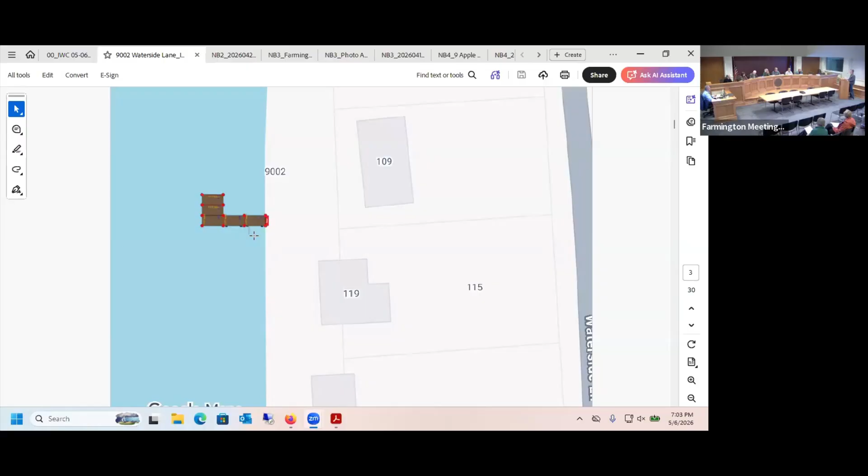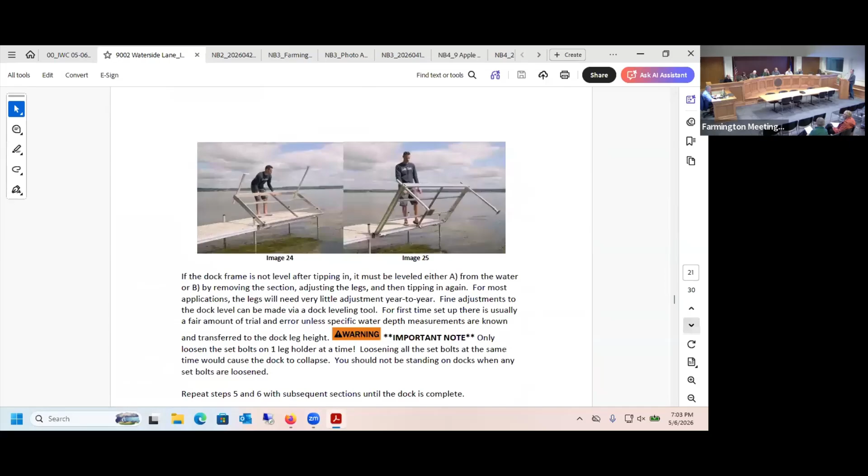The application was accepted a month ago. Nothing has changed in the application. It's aluminum and untreated cedar, and it requires about 4 screws to screw into the wall next to the bulkhead there on the lake, and then remove it, put it out in spring, remove it in the fall. No, nothing else has changed. I'm happy to go over it again as a refresher if anybody wants to, but otherwise it hasn't changed from last time.

Okay, you might as well just quickly, in case those that weren't here last meeting. Yeah, sure. So it's going to be about 24 feet long, 5 feet wide, with a small platform at the end. The retaining wall, as you can see in the photo there, it existed before we moved in. So it's there, we're going to literally screw into the retaining wall.

4 screws. It's 2 aluminum pieces along the retaining wall, and then the segments drop right into the water. They settle on the bottom. There's no footings required, there's no concrete, there's no anchoring other than letting it sit on the silt on the bottom. Each segment is, I don't remember off the top of my head, but I believe it's like 6 by 6 or 8 by 8 or something like that. And you drop each in, and then in the fall you can literally lift them up and pull them out. That's pretty much the extent of it. It is like in that photo, it'll be literally right there.

I took a photo of where the design is to screw it in. It requires no removal of trees, brush, no construction of any kind, really, just the screws. Okay, I don't have any questions on this. I'll ask the board. Mark? No questions. Robert? No questions.

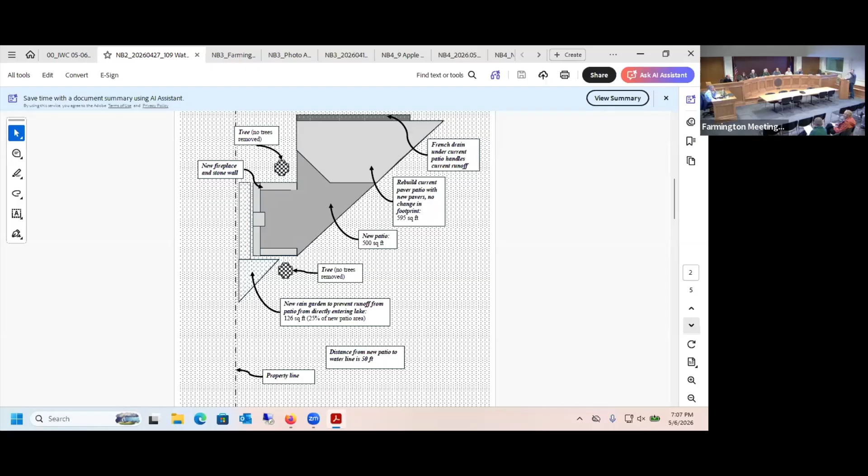we want to remove the existing patio and replace it with new pavers and extend it slightly, an extra 500 square feet of patio. The goal here per the picture is we don't want to remove any trees. In fact, West Hartford just did a report about tree cover in West Hartford, and it's a big problem that people are removing trees. So we're actually working around the trees, and we wanted to put an outdoor fireplace on the left. In order to deal with drainage at the top, down to the water, you can't see in this picture, is about 60 or 70 feet down to the water, and we're up on a hill. So the grade of the hill actually goes towards the house, not towards the water.

You can see it in those pictures. That grade actually comes towards the house. We actually have more problems with water coming at our house than going away from our house.

But for drainage of the new section, we are proposing a rain garden that effectively wraps around the back of it. We got guidance for the rain garden from UConn about the depth of it. They suggested 5 inches, but we were actually targeting 12. And the University of New Hampshire has a list of rain garden plants that are best for absorption of the rain.

The garden would wrap such that it basically connects with where the water from the other drainage is already going. So really, our desire here is to extend that patio out between those two big trees in the picture.

and put a fireplace between them. We talked to the association around the lake, and they approved. We had to present to them as well, and they approved it. I think that letter is attached in your materials. But that's the extent of the work that we're looking to get first accepted as an application and then approved.

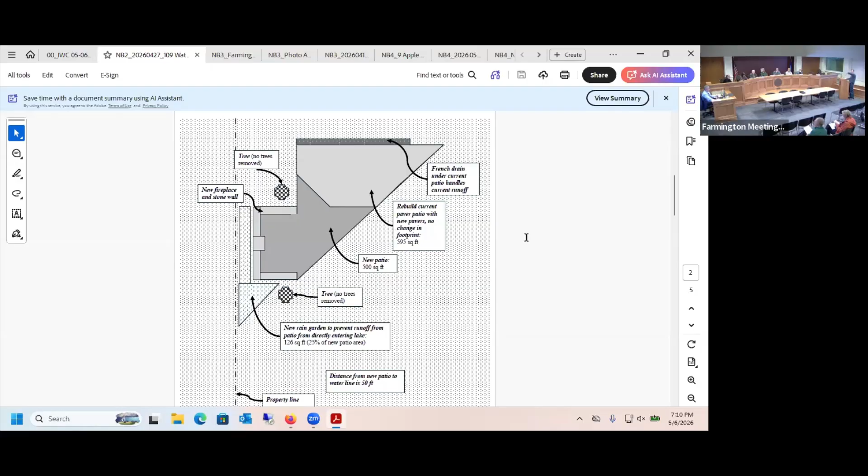And the pond is over here. The pond is actually on the total other side, past the property line. So the pond is off where the tree is. If you go down, the pond is below everything. It keeps going up, there's a little bit of a graded hill, and then it swoops down into the lake. So the pond isn't even pictured.

The best way to see it is the other image, which shows the property and the lot number there. There's another image, the aerial image. How about this one here? Is this any better? Does this help?

Yeah, that helps. So the patio, I can point to it right here. These are the trees. It would be here, the lake's over here. The rain garden would be roughly here and back here. This is the grade going towards the house before it swoops over there. So it would meet with the existing drainage that's already there, that's the goal.

Bruce, how do we get that screen on our tablets? It should be on there.

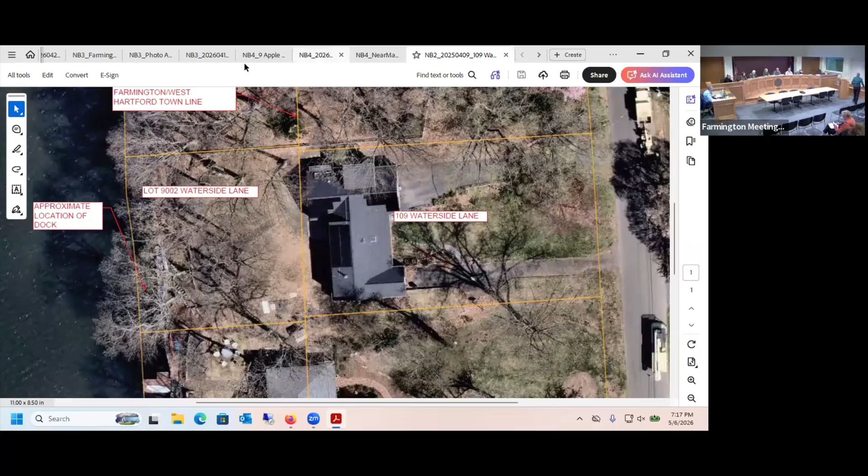Thank you, Mr. Chairman. I'm Peter Darpalin, 21 Centerbrook Drive. I'm here representing the Farmington Land Trust. I'm a board member.

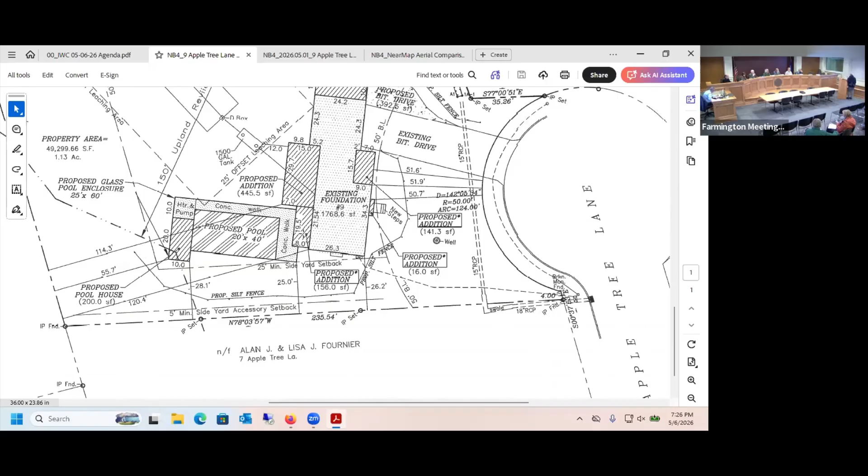And the rest is the pool. So the pool is being constructed at the same time? Yes, the pool was already approved on the last permits before the house burned. They had to dig the hole out and everything, but the house burned, so the construction stopped.

And that map was prepared by your surveyor or? Yes, that's the surveyor and the architect.

So it's just within your lines, slightly, or you have some increase on the ends and a little bit in the front and the back, is what you're saying? Is this a basement foundation? Yes, that's the basement foundation.

That's all the questions I have at the moment, but do you have - is the house fully designed? Yes, yes, I sent the plans to Bruce. Yeah, I thought I saw the plans on SharePoint. Do you want those opened up? No, okay, I'll open it up for questions.

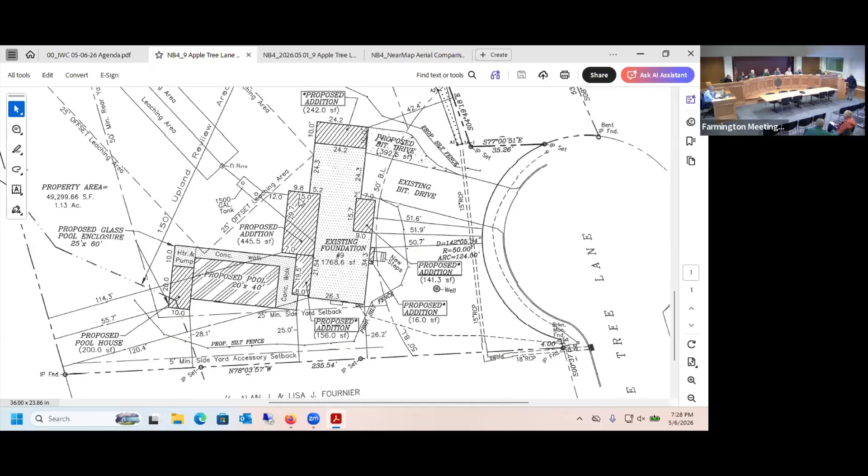Is the runoff from that extended driveway extension going to flow into that stream? It's questionable. I mean, it all depends on how you grade it. Grade it, yeah. I mean, I'll get over to the picture for you.

So here's the garage now, and that addition will be out here. Okay, is that the new garage? No, this is the old one, this is the actual existing garage. He'll be extending it out this way. And then that driveway would come out to here and stroll around.

So if you pitch it up, you can technically kick it back into the road if you wanted. But after that, it would grade down into that stream, which is over here.

Yeah, the driveway is what concerns me. I mean, a garage is a garage, and it is closer to the wetlands than it was before. I think that's a good point about how to elevate that driveway so any water would bank away from the wetlands and go to a different direction. Eventually it all gets to the same location though.

Let me open this for you. Where's the swale? There's supposedly, was there a swale? Yeah, give me a second, let me open up the GIS.

Because the water that comes from the driveway already goes into that swale, and it's gonna meet the other corner of the swale. So it's the same thing.

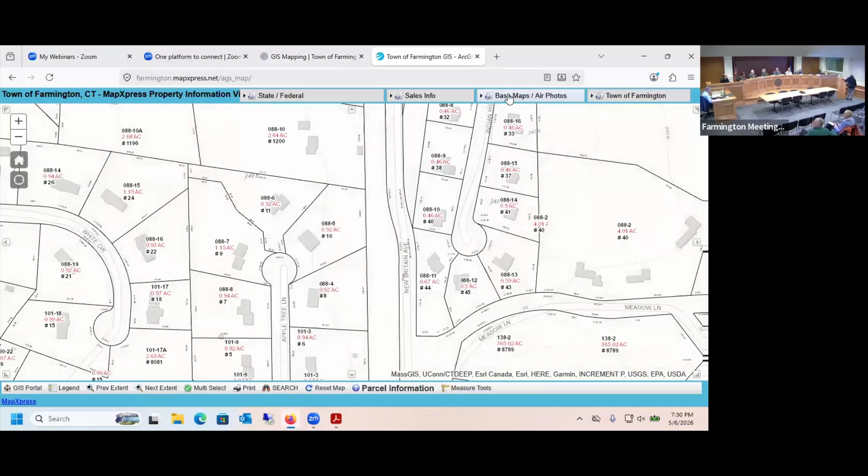This wetland comes down, goes underneath his driveway, and outlets right here, okay, to this inlet pipe, which then flows out and goes out towards New Britain Avenue into these backyards, and eventually goes across New Britain Avenue.

So this driveway, if it does pitch out to the road, would come out into the road, hit the gutter, follow the gutter into the catch basin, and then go out that way. So it's just a matter of how it gets there, but it all ends up in the same location at the end of this outlet. So if it did slope towards the driveway, it would go down to the street no matter what.

Yeah, exactly. Actually, the driveway has the curb cut, but this little extension is not gonna have a curb. No, it shows like a little lobe or something over here, just enough to get in, come off, and get into that third car spot here.

So you definitely do want to direct it towards the existing driveway. Yes. That's my only question at this time. Yeah, I think because in case something's spilled in that driveway, at least you'd have a chance to catch it in the driveway, block something, as opposed to if the driveway was sloped towards the water source, then there wouldn't be enough time to stop much of anything. So I think, and that's your intention, is to slope that added driveway back towards the existing driveway? Yes. Okay, all right, Robert?

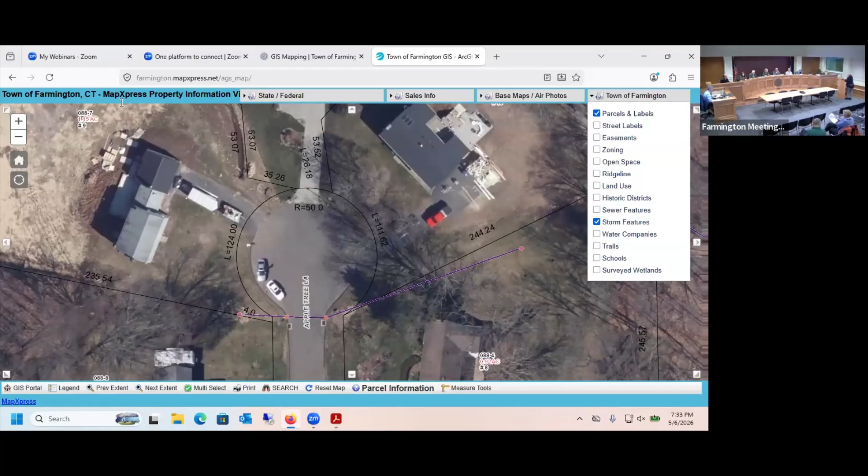So just to bring some of the people on board that weren't here back then, this is what the property looked like before they got the approval, the first approval in 2021, I think it was.

So there was some work approved for this area here for the pool in the back. We went out there, and this area here was all cleared. As you can see here, this is the area that was cleared, and this was all wetlands.

Came in for a restoration plan. Wetland scientists developed a plan. They went out, planted some of it, because some of the stock was not available at that time in the spring, so they were waiting for the fall. So the spring plantings were planted, and then we had the summer, and then the fall, and then there was no work after that.

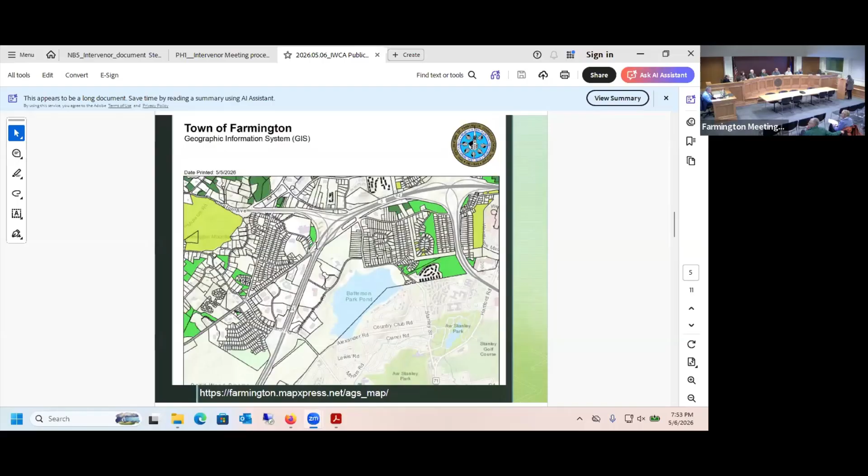This is a map showing the extent of open space currently surrounding Batterson Park. As you can see, the area immediately surrounding Batterson Park Pond is already substantially developed. You can go to the next map - this is the Farmington zoning map, showing that the orange and yellow area immediately surrounding Batterson Park Pond is residential. The conversion of this area for industrial use will exacerbate the extent of high intensity development, which is just not consistent with the residential use currently surrounding that area.

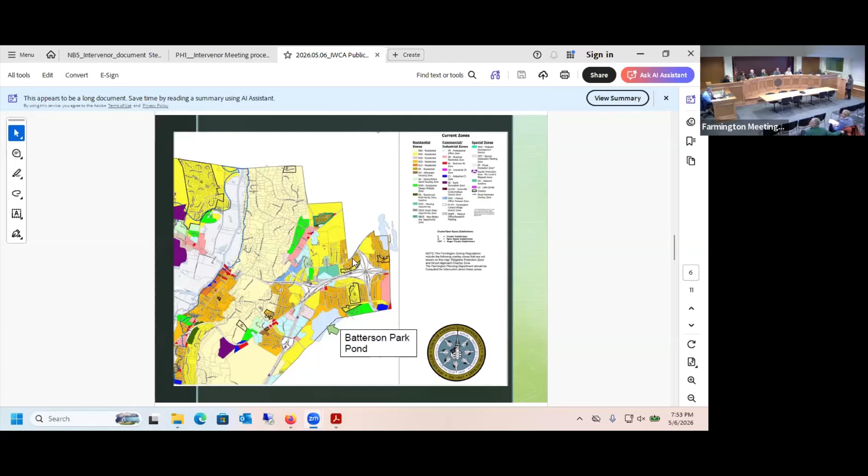The plan will negatively impact water quality with unreasonable pollutant loading and loss of filtration. The plan's reliance on engineered systems carries high risk. Underground retention systems and hydrodynamic separators are insufficient given the proximity to wetlands.

Studies show that TSS removal efficiencies could be only 30 to 50%, and have also shown that dissolved pollutants would not be treated by these systems.

No infiltration is allowed based on the proposed land use, and the plan intends to use wetlands to treat the stormwater, but that should not be permitted. There is no evidence of pollutant treatment capacity in this design. There's a high risk of dissolved pollutants that will not be treated by the current proposed plans, and these could be sourced from diesel spills, hydrocarbons, heavy metals, and PAHs.

Maintenance failure risks are inherent, but they should not be discounted, and there are no contingency plans in this proposal. Groundwater contamination would require costly and long remediation. The long-term impacts of this proposal are more likely to be irreversible.

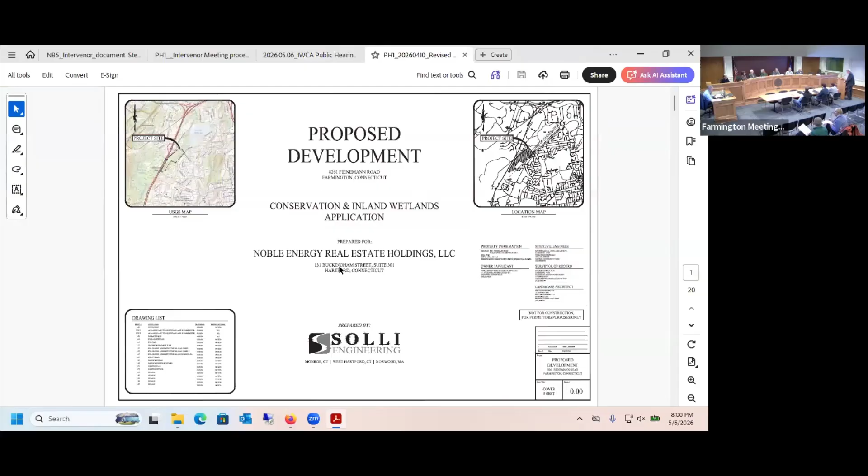So the current version of the plans that you have in front of you are dated April 10th. We believe that they present a feasible and prudent alternative to the plan in the original application. We've eliminated the restaurant building, decreased the size of the travel center and warehouse, reduced the impervious surface, and increased the buffers. We've increased the mitigation and other wetlands enhancements to further reduce the possibility of any adverse impacts.

And there is already expert testimony in the record that there will not be any adverse impacts from this development. Bruce reviewed the revised plans, and I think just this afternoon we received his comment on that. He did indicate that if the commission chooses to approve it, he believes the plans would not need further revision for you to do that. They could be approved with a condition of approval. We haven't had a chance to go through all his comments in depth, but I don't see any significant issues with anything he's asking for.

So for tonight, our response will be somewhat limited. We're going to have Tyler Capel from Solli Engineering address some of the questions you raised last time. Mike Frisbee is the owner operator of the Noble gas station locations in southern New England. He's going to address Noble safety protocols that they follow for handling materials, fuels, gasolines, diesel fuels. Jackson Smith from William Kenny Associates is here, and Bill Kenny is on the call.

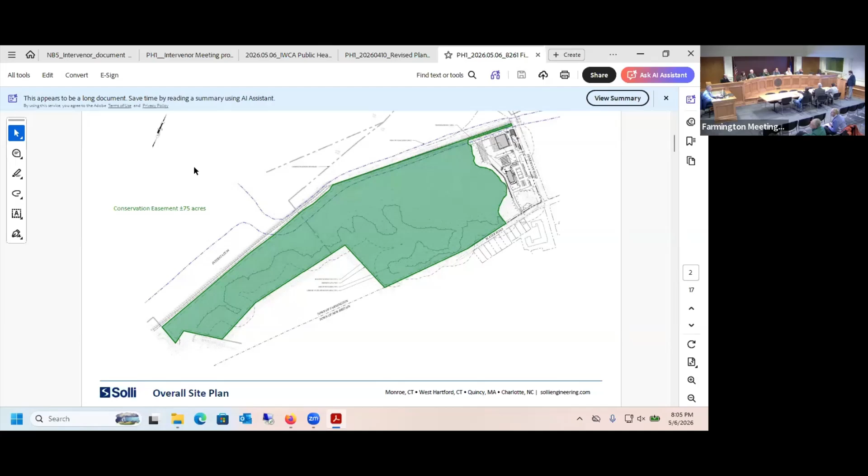I just wanted to reiterate what Bob said about this being a prudent alternative. If you remember from our initial filing, we had a warehouse that was 28,000 square feet. We've reduced that down by 10,000 square feet to 18,000. The travel center was 10,000 square feet, reduced down to 8,400. There was also a restaurant use that was to be included off to the northeast corner that has been removed from the application. We've reduced the impervious area down to about 4.5 acres versus it was over 5 previously.

Previously the western drive along Fienemann Road was going to be a direct impact in the wetlands pocket along Fienemann Road there. Through the redesign, we've been able to shift that to the east to avoid the direct impact and running through that wetlands. There will be some minor impacts with grading purposes, but again it is a huge reduction versus what we were originally proposing to do.

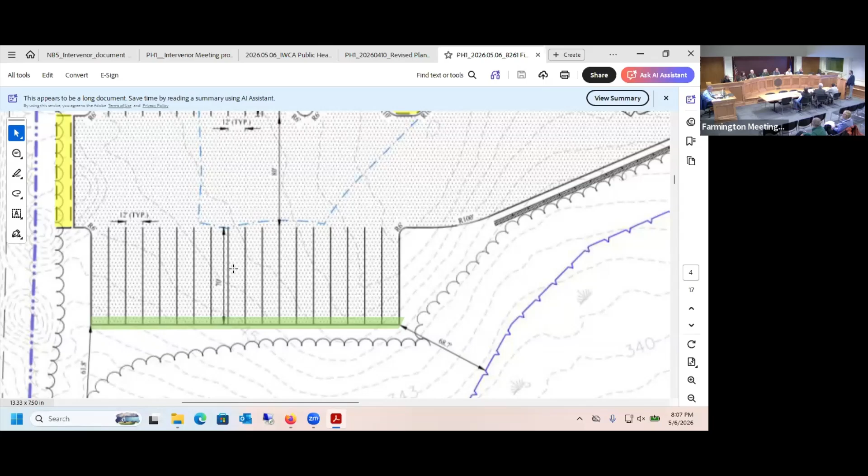The access drive along Slater Road, we have talked about doing what's called a Cape Cod curbing. It's essentially a much shallower curb that would allow the salamanders and other animals to travel over the curbing and get up into the other isolated wetland pocket along Slater Road there. This way, we're not completely shutting off that area of the site from any animals who may be using that currently.

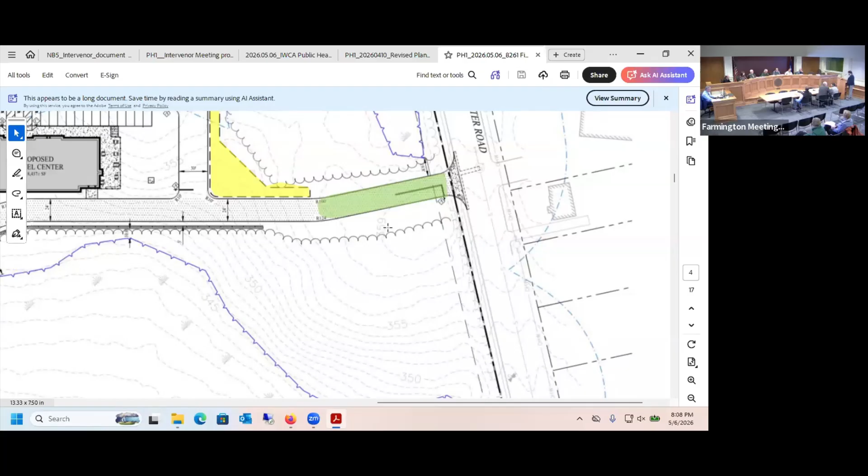The last area of highlight on the wetlands on the Fienemann Road there, the small green, is the indication of where the impact is now from grading purposes. Again, this is going to function still as part of the wetlands, and it is just going to be disturbed during construction and will be mitigated as part of Jackson's design and Bill Kenny's.

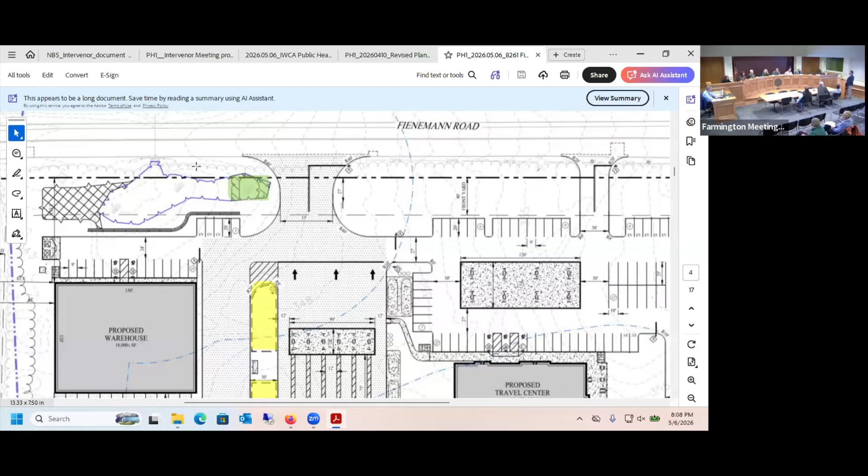Some other questions brought up were about the fill that was going to be needed now that we are no longer cutting where the restaurant was previously going to go. As part of our initial design and designs in general, we try to limit the amount of fill we need to bring in. Obviously, ideally it would be a balanced site, not having to fill or cut. We do our best to get as close to that as we can.

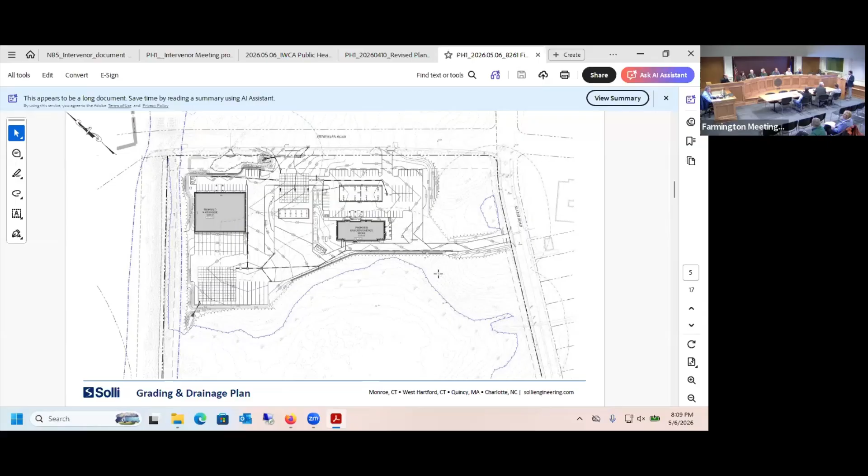Given the existing topography and being able to maintain appropriate slopes through both drives, parking areas, as well as ADA ramps for the sidewalks throughout the site, we did look into whether or not we would be able to reduce that fill. Unfortunately, we aren't able to reduce it in a significant amount. This will be about what was shown at the previous hearing, which was just over 5,000 cubic yards, I believe it was.

In terms of the development size, I just want to bring up again that this is a small portion of this site. We are again looking to conserve over 85% of this site. The developed area is roughly 7.5 acres, and we're limiting any clearing outside of that development area to pretty tight. We don't want to clear any more than we need to in order to construct this. So again, just wanted to reiterate that it's a small portion of this site.

For the dissolved pollutants, we are looking into alternatives in order to add some biofiltration into our stormwater design that will address those dissolved pollutants, to capture and remediate some of that as it's treated prior to getting into the retention system and ultimately into the discharge. This could be in place of or in addition to the hydrodynamic separators.

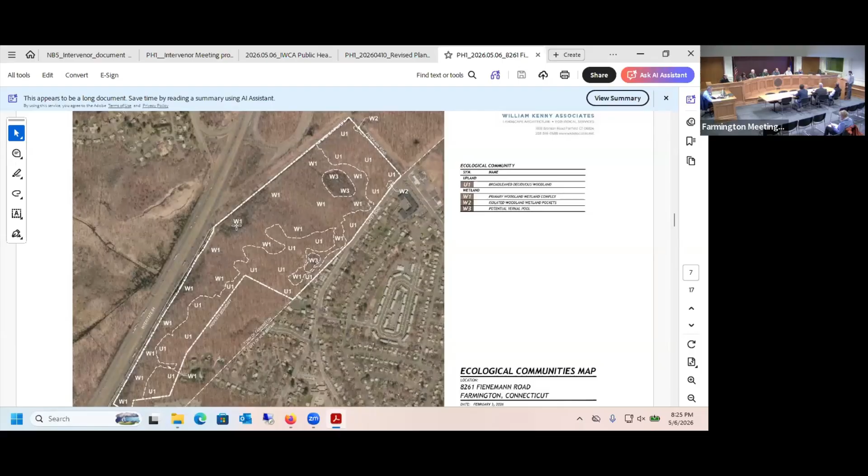In that one, we identified wood frog masses in early April. Those hatched and transitioned into viable wood frog tadpoles when we were out there in late April. We also still saw the spotted salamander masses present in late April.

As discussed at the last meeting and in our report, there are 2 areas of concern when it comes to protecting vernal pools: the vernal pool envelope and the critical terrestrial habitat. The vernal pool envelope is your 100-foot buffer, which helps support the water quality of the pool as well as adds regenerative organic materials back into it. The critical terrestrial habitat, which extends about 750 feet from the pool edge, is real habitat for the species used for foraging and overwintering during the non-breeding season.

In an ideal world, you would have 100% of the VPE undeveloped and 75% of that larger CTH undeveloped. However, it has been documented that you can maintain a tier 1 high functioning vernal pool if you reduce to 75% undeveloped in the VPE and 50% undeveloped in the CTH.

To talk about those in percentages, currently for vernal pool 1 in the north, it's 100% undeveloped VPE and 77% undeveloped CTH.

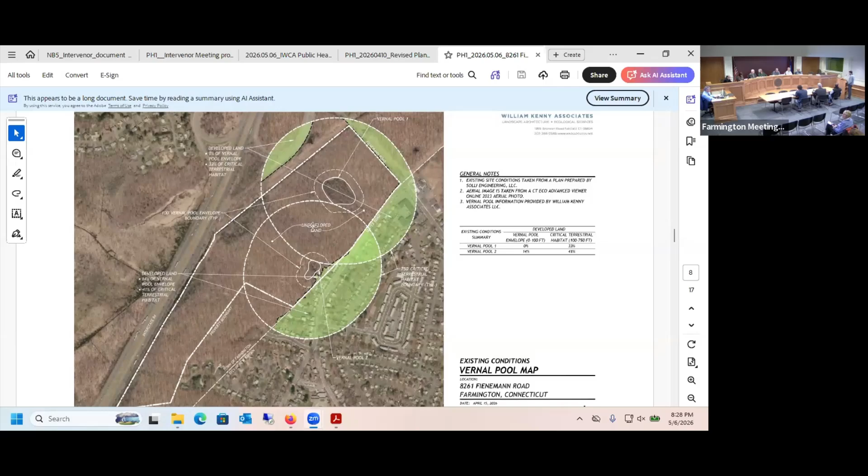When we talk about vernal pool 2, farther south, unfortunately that vernal pool envelope is not 100% undeveloped. This is due to several abutting homeowners, including the intervenor, who have trespassed onto the property, deforested the vernal pool envelope, and developed impervious surfaces and overall a low value lawn habitat within that vernal pool envelope.

In addition, this image is pretty clear. You can see that almost the entire portion of VP2's eastern segment of critical terrestrial habitat has been lost due to residential development. Our project is roughly 1,000 feet from vernal pool 2.

As such, we're going to have no alteration to that pool's VPE or CTH. And to reiterate, the project is not going to alter vernal pool 1's VPE. Rather, we see two primary changes that are going to occur.

First, we're going to place 75 acres of contiguous, unfragmented woodland into a conservation easement to protect these pools in the long term and prevent future encroachment into either pool's vernal pool envelope. Second, we're going to raise the developed portion of vernal pool 1's critical terrestrial habitat from 23% to 46%.

I know off the bat, 46% is a number that may be a little uneasy, but I think it's good to look at a real world on-site example of this. If you look at vernal pool 2, not only is over 40% of that CTH developed, but 14% of its vernal pool envelope is also developed.

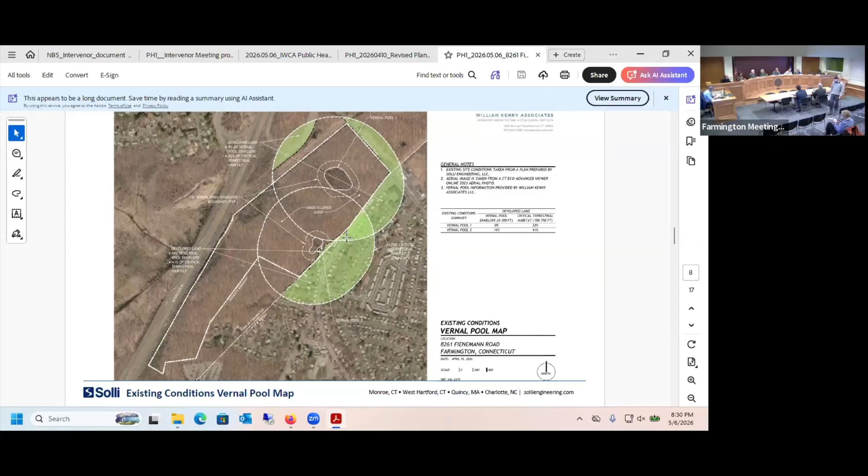Good evening. I'm Bill Kenny, a principal of William Kenny Associates at Fairfield, professional wetland scientist, soil scientist, and landscape architect.

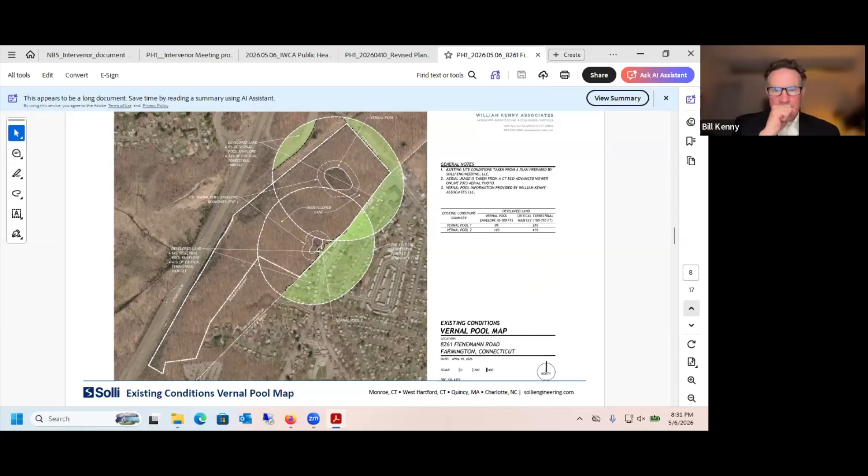We did include here some photos before we get into the drawing itself. Wanted to review with you this photo of existing conditions.

This water, because of the pipe that extends beneath the road, conveys this water to the north to Batterson Park Pond. The water will come off the road and pretty much go right into that pipe and down towards the pond. This is linked to our proposed mitigation.

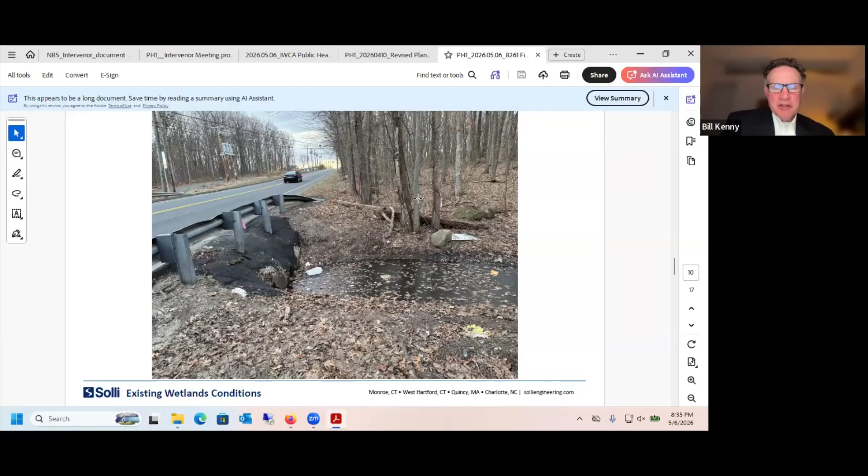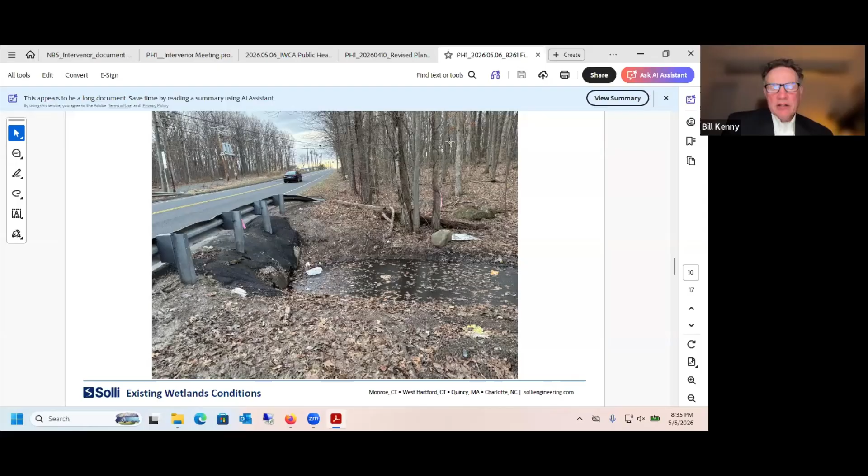And with the proposed project, even though we're not eliminating the majority of this wetland anymore, we still expanded the wetland. The next couple of photos are examples of work we've done on other projects. That's another photo of the existing wetland — a view further south of the initial photo. We just turned to the right and looked into the property. The road is off to the left.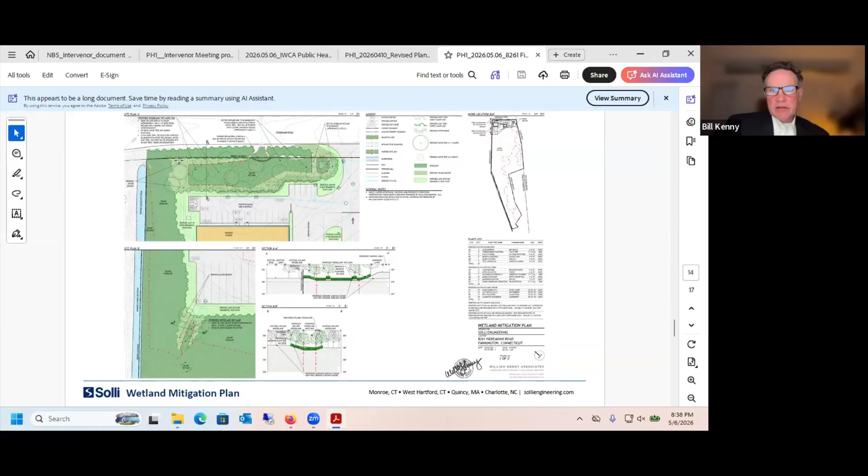So the next slide, I believe, is our drawing. This drawing has a variety of information — we have two plan views, the northwest corner of the property, and Fienemann Road is to the north; north is up on the page. The curb cut I talked about in the initial photo is just to the left of the cursor. You can see a light blue line, which is the pipe that extends under the road. The wetland is a dark green area with a red dashed line around it, with a W around the dashes. The existing wetland is on the right-hand side, and we're proposing to expand that wetland by close to half, maybe 40%, to the left.

And we're proposing other modifications: removing invasive vegetation and planting native vegetation, trees and ground covers, similar to the last photo we saw for the project we worked on in Stratford.

We would be collecting the road runoff just east of this image, putting that into a catch basin to remove some of the coarse sediments with a deep sump and hooded outlet, then discharging that into a sediment sump at the eastern end of the wetland, just to the left of the entry drive.

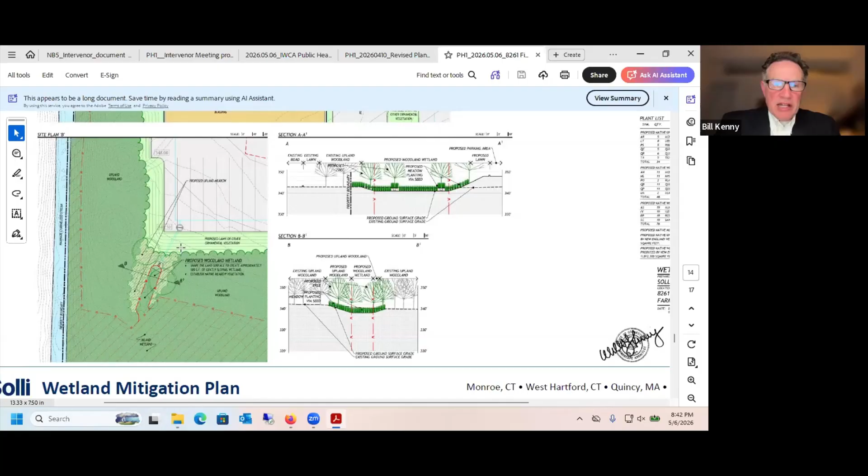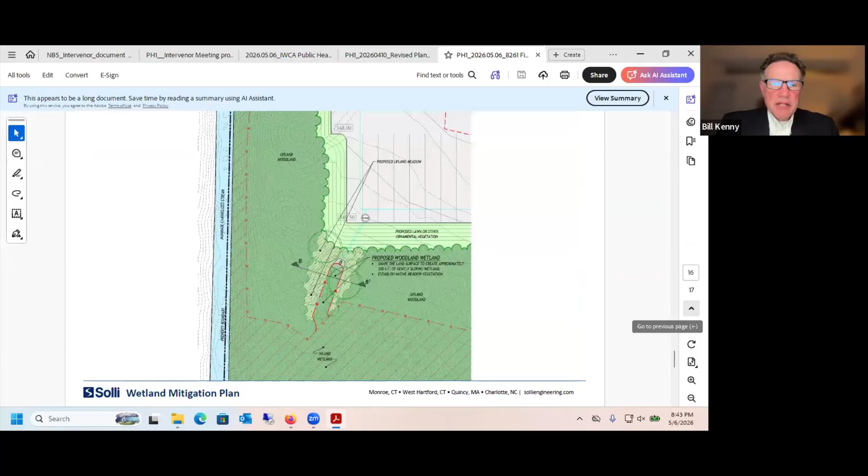Also, a comment from Bruce was to identify on the plan views where each plant is going—we have symbols for the plants but didn't call them out by species, so we can add species indicators to the plan as well. We also have a second sheet of drawing with a very detailed and comprehensive set of notes regarding how this work should be completed, monitored, and maintained long term, including planting details.

Be pleased to answer any questions that you might have.

Is the applicant complete? Okay. Well, will the intervener have any questions for the applicant?

I have a question for William Kenny and Associates. I'm not sure if Bill or someone in the room would answer, but do you agree that the groundwater and surface water from the northern wetland slopes down towards the vernal pool?

William Kenny, are you there? Would you clarify when you say the northern wetland? There's a wetland to the northwest that we've been discussing, and the northeast area, where the planned development is. Let's just call that north.

Do you agree that the groundwater and surface water from that area slopes downward towards the vernal pool? A portion of that—the eastern, southeastern portion of the development where the access road comes in—does slope down towards the vernal pool, and drains to the vernal pool.

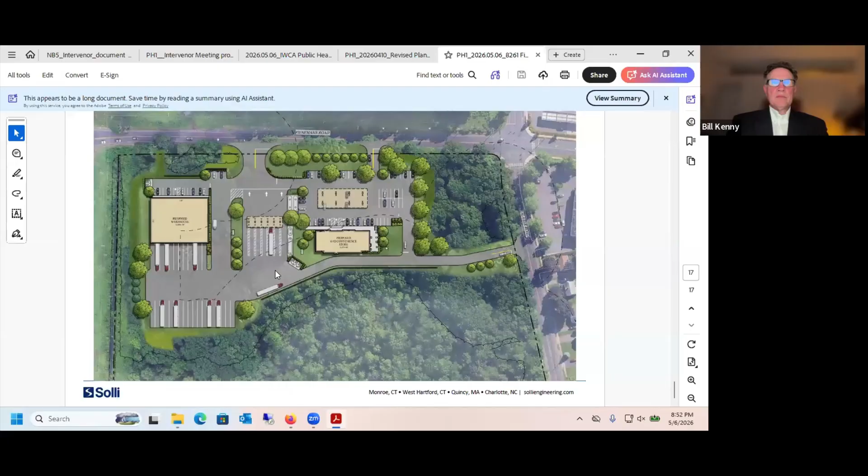These are all the reports in the files, just to give you an example of how we manage issues on the property. So you see something in the behavior with the spill bucket there—yes, things happen, but we take care of it right away. Okay, it does.

But isn't it true that one report says it was for an unknown amount and an unknown time frame that this spill bucket issue existed? It says that, but you can tell it wasn't for an unknown amount of time. We have a time frame: when DEP was there on August 12th, everything was in order, and by August 19th we had identified the problem and put a plan of action to fix it. So it wasn't for an unidentified amount of time.

Within that time frame, we typically get 2 to 3 deliveries a week, so we can monitor exactly what went into the tanks and what water went into that general area. It says we extracted just over 2,000 gallons of water, but they didn't test it or measure how much of that was gasoline, just the water that came out of that process. We keep pulling it out so we can tell if there's anything in the water. Once it's clear, they stop. So it was 2,000 gallons of water extracted from the ground that has some gasoline in it.

Thank you, I have no further questions. Okay.

So now we'll have questions from the commission to the applicant, and I guess I'll start. How large is that spill bucket, what's the volume of that? So the spill bucket is about 5 to 7 gallons.

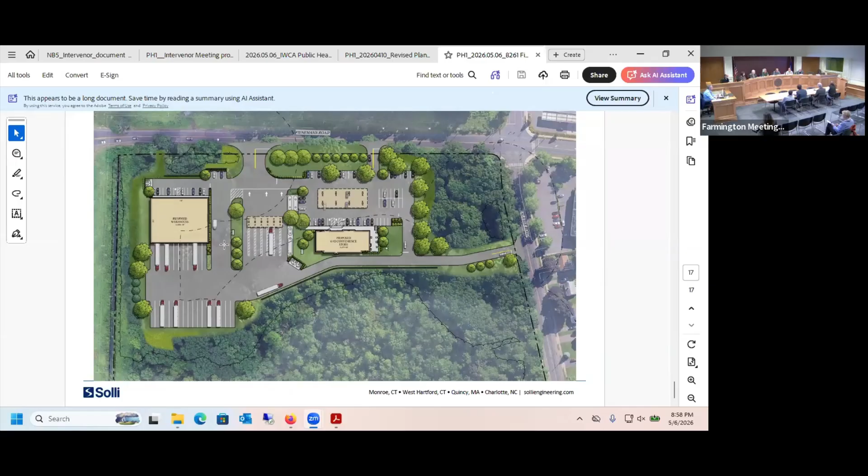A couple of questions. I'm glad to see you're putting the large curb on the south side of the truck parking there. There seems to be a gap between that and the wall. Could that be made continuous? Because it would seem that would be a pathway for salamanders to go.

Okay, and my second question is about the vernal pools and your new letter, Jackson. I guess it's just more of a semantic thing now. You say to maintain a high functioning vernal pool, the best management practices indicate 25% of the VPE and 50% of the CTH should be maintained. That certainly pertains to the assessment sheet referenced in that document. However, in the actual best management practices later in the document, it says the tier 1 should be adhering to these, where it states that for the critical terrestrial habitat, maintain or restore a minimum of 75% of the zone in unfragmented forest with undisturbed ground cover. So the best management practice is to get back to 75%, but you would qualify as tier 1 with the lesser amount.

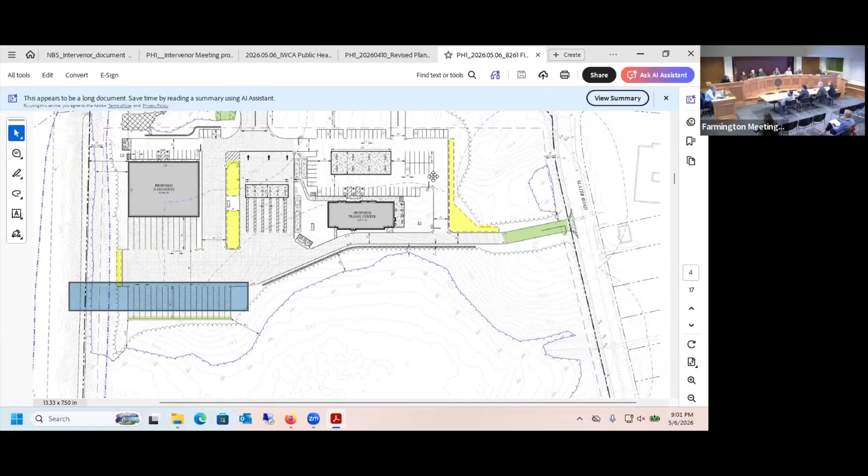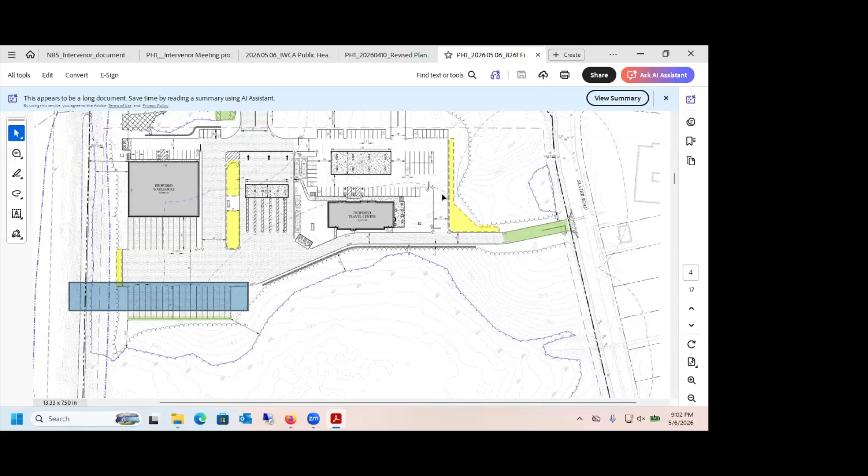Could you clarify which area you're referring to? The area that the intervenor was talking about, sloping towards the vernal pool for the runoff. I believe it was the rear drive-through or pass-through. Vernal pool one. I guess I'm just trying to understand exactly what you're asking, whether it's the existing slope you're referring to, or the area behind it. Just the overall slope — if there's a potential way to remediate, since the concern from the intervenor is that runoff, by basis of the slope, is going towards a vernal pool, is there any way you could consider a remediation or redirection to stop that runoff from going towards the vernal pool? That's essentially what I'm trying to ask.

So the stormwater runoff is going into the underground detention system, which is then outletted into the wetlands area to the southwest. The vernal pool is off more to the east of where the outlet is, so it's not directly towards it. I see, thank you. Then I don't have any other questions.

Okay, Frank? No questions, Mr. Chairman. Alana? No questions. Okay, I thought of another question.

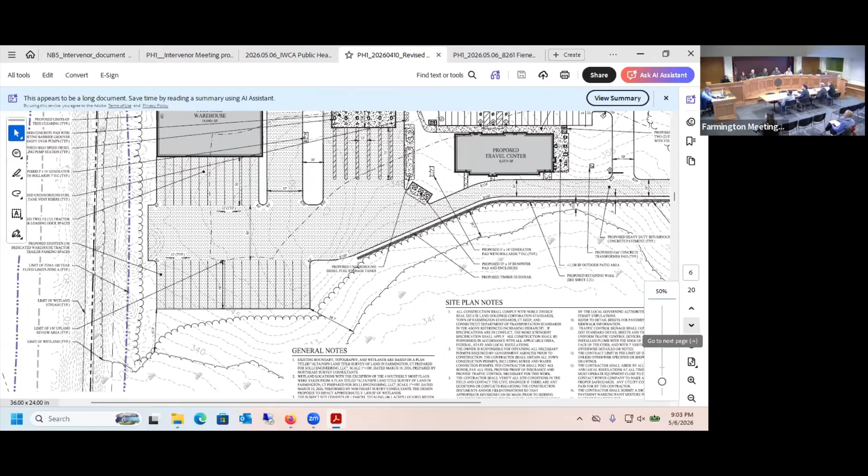The snow removal area that's next to the truck parking, in the southwest corner — I know there's a rise there and then it goes back down to the water. Is there any risk of that snow being pushed up and over, and then rolling down? It shouldn't, because it mounds significantly in those areas where our elevation is — we can see those mounds through the distance — so everything as far as storage is concerned should flow back onto the development.

Okay, and then one question for Michael. I know you talked about class A, B, and C and other ways to hopefully provide protection for that area, but what about the warehouse? Are there any requirements on the warehouse? Because in regards to that, I know you could set up rules saying we're not going to have hazardous material storage, but how do we know you have people who follow the rules and people who don't?

Sure, I'd be willing to get to that point, to put a condition on the fact that we won't have that. I will own that facility and lease it out, so I can put that into my lease as well, saying they don't have that. I will look into that.

Chair will entertain a motion to enter all the reports and testimony from the Inland Wetland Commission meetings of 4/5, 5/6, into the record for the Conservation Commission meeting. Please, a motion. So moved. And a second. Second. Motion made and seconded to enter all the reports and testimony.

All those in favor say aye. Aye. Aye. Opposed? Abstain? Motion passes. All right, the applicant has no additional information. The intervenor, do you have any additional information? Okay.

Intervenor, applicant cross-exam. Do you have any questions for the applicant, or to the intervenor? Any additional questions? We just have to redo everything we did in the last meeting because they're two separate commissions. Are there any additional questions to the intervenor from the commission? Are there any additional commission questions to the applicant?

All right, closing remarks from the intervenor? Go to the microphone, please. The only thing I'd like to say in closing for this particular commission is that under Connecticut General Statute 7-131A,

You had mentioned, Bruce, something about the encroachments. At least one thing we could focus on. So if the encroachments are now going to be part of the conservation easement, does that mean we have to deal with those encroachments? Well, you don't. Let me get to them. I'll show you what I'm talking about.

I guess, is it the line for the conservation easement? Does it include the encroachments? They have not come up with full bearings and distances for the conservation easement. There's that one graphic that shows a large area, going back to my original notes, I want to say it was about 50 acres or something like that. They said that they wanted to put that in the conservation easement, so they just showed everything from the development line, more or less, over. There's no actual detailed line where that is. We haven't seen a plan, but it does encompass, when you go back to the presentation here.

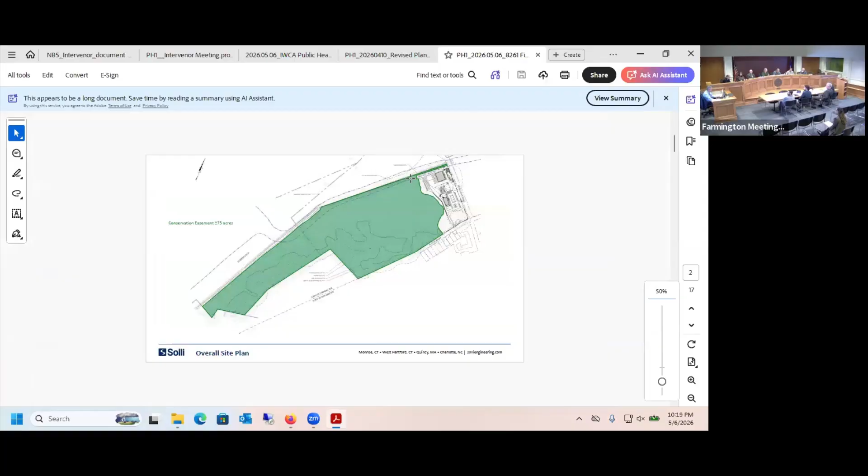So how about, okay, this line is roughly a straight line. Yeah, it's arbitrary because I don't have a survey map showing bearings and distance, but all of this, they're showing it hugging the property line, up to the property line this whole way. So when you get down into here, you'll see there's a large amount of encroachments into those areas. Right, okay, so how do we want to deal with those encroachments? You know what I mean?

As the Conservation Commission, one option could be that they must deal with these encroachments - get them off the property or modify the conservation easement. If they can't negotiate these, they need to put the conservation easement around these properties and coordinate that with staff, because we don't want these areas under our conservation easement. It's a violation from day one that I have to deal with.

They're also within the envelope for the vernal pool, so the option to deal with them should go forward. Again, that's something the Conservation Commission does - it's under their purview, all of these conservation easements.

Mark, do you have a feeling on the intervenor petition? I'm just trying to understand this - that dark line is the Farmington line? It's the shared town line and the property line, both. So people have done things on the other side into Farmington property.

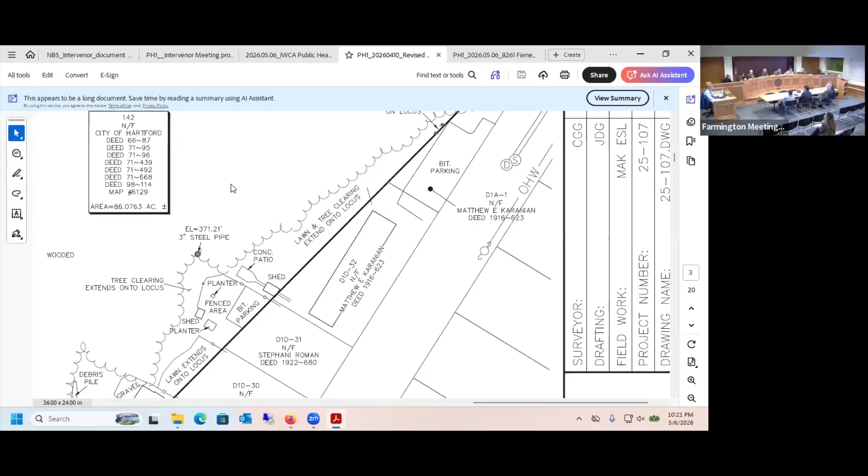At this point it's hard to see from the documentation and pictures, but they're within 150 feet of the vernal pools. So if they are within 150 feet of the vernal pools and they're in the town of Farmington, we have every right to regulate the activity in that area.

If we're concerned about what this project will do, why shouldn't we be concerned about what is obviously happening in that area too? I have no problem approaching it that way. We have to look at the total picture, not just the 8 or 9 acres they're going to develop - it's a whole piece of property we have to look at. I think I'd approach it that way, if we were going to make a recommendation.

I don't know if I wanted to get that detailed on this. I'm thinking, what if the Conservation Commission refers the intervenor petition to the Inland Wetlands and feels it provides merit worthy of consideration?

So you're saying that it's worth considering? I don't know if that was one of our commissioners chiming in. So you want to refer it to the Inland Wetlands, saying that it has merit worthy of consideration? For what - that it has merit worthy of consideration?

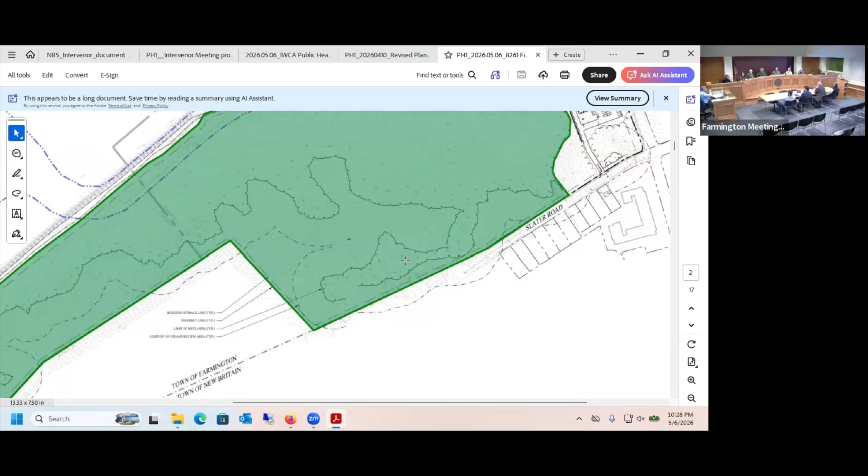Can we do this tonight? I think we're kicking the can down the road. But if we don't do it tonight, we can't have the final meeting until June 3rd, right? No. It seems like this could be handled on the 20th, or if we hold the Conservation Commission meeting before the Inland Wetland Commission meeting on the 20th. We talked about that last week, but I never heard an answer. Could you do that? We talked about closing one and opening the other and then closing it again. I don't know. I'd be all right with that language.